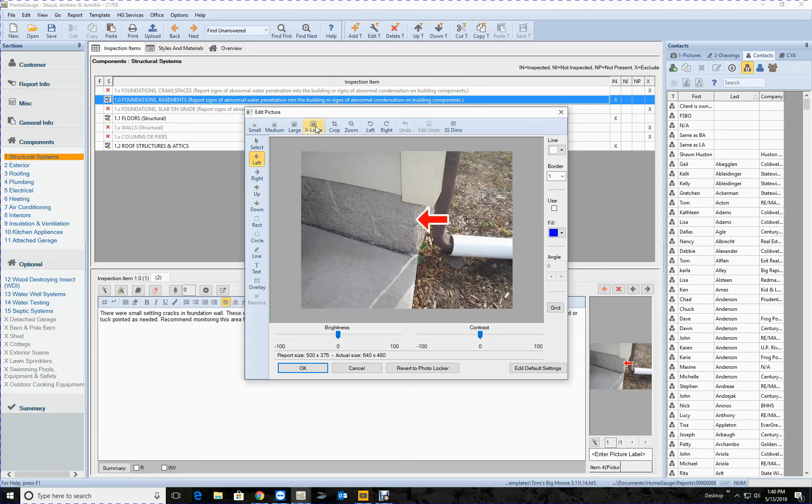Okay. Good comment. Safe comment. Okay. Okay. Pretty clean place here, eh? What if they all could be this clean?

Okay, let's answer this one. Always want to answer this one. So, of course, there's no snow, so we used to say grounds were snow covered, but you could say grounds were overall with a positive slope away from the house. That's a good safe comment. So just say something here. If you don't have anything else to say, driveway or patio or walkways, retaining walls, then just put grounds were overall, as we can. Okay.

Okay, let me see what you got here. Let me go over here and pop up these photos here. Let's see what we got. I take it you didn't get on the roof. Yeah, it's pretty steep. You can see all the sides. Look good.

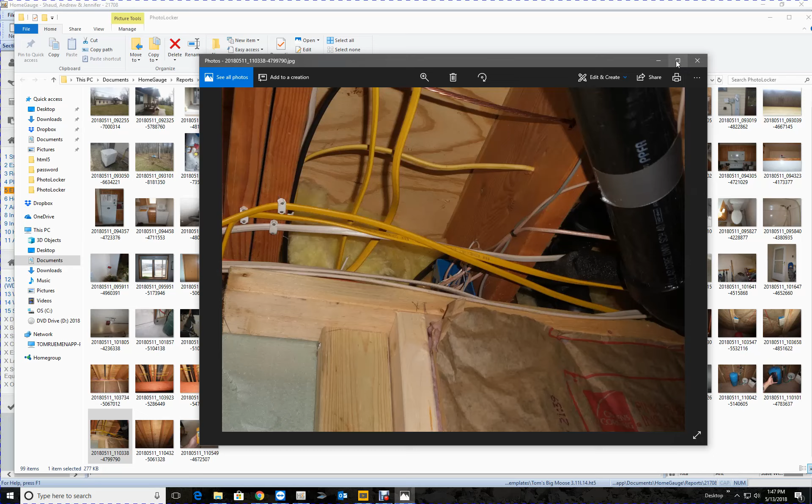Those do not look like, let me go back. They look like telephone wires. Let me see. Let me go back to the photos. Where is it at here? Is this it? Right there, let's see. See these wires right here? Those are telephone wires. That's not the Romex. So we don't care too much about those. That's not important to us.

Okay, so not a big deal. We don't need no R, no investigate. Okay, what's this unless otherwise stated? Not too crazy about that stuff. Okay, let's see how it looks here.

Okay, that doesn't mean it's not above the counter. It's inside a cabinet. It's for the microwave. That does not need to be GFCI protected. So nothing wrong with it. It doesn't. Yeah. So I'm just going to delete this whole comment. It doesn't need to be there.

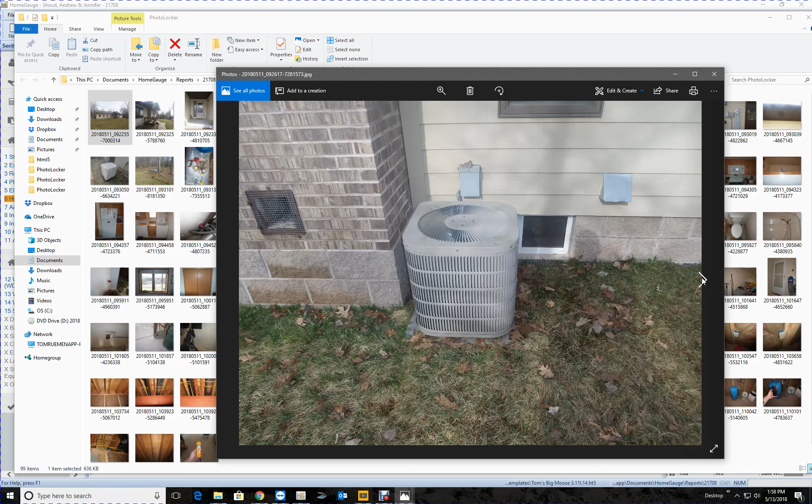Yeah, what's going on here? The door fell off, so they put a screen there. Well, we might want to address that. Maybe you already did. Okay, so the electric heater was in that room. Wonder if there was a heat vent in that room. What do you think? There's that carpet there, and no, that's the living room carpet, maybe. That's a little different carpet. Well, I guess we don't know, Joe.

So we can assume that this is in that back porch, sunroom, I guess we'll call it. There was one electric baseboard heater in the sunroom that did not work when tested. Well, something is needed. So let's see. There was one electric baseboard heater in the sunroom that did not work when tested. So we could say further evaluate.

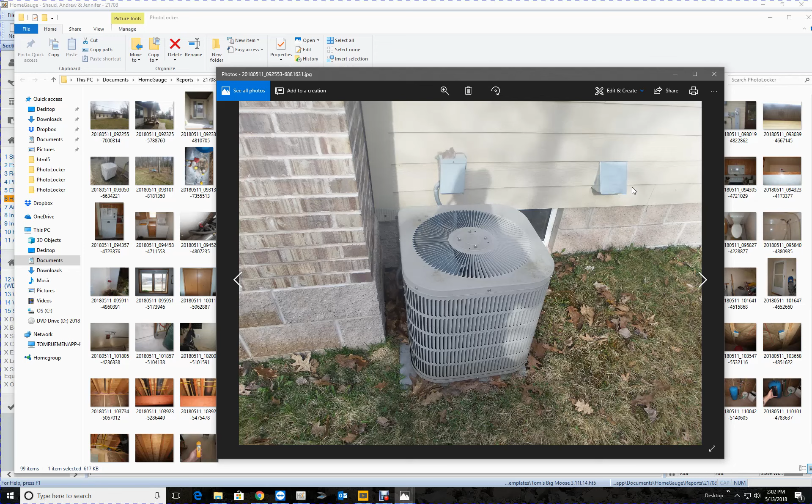I'm not too concerned about this. I mean, you're not even saying what that is. There's nothing wrong with it. So let's see. It's over here near the furnace where there's the AC unit. So I imagine it's probably, if it's not the dryer vent, is it the dryer vent, or you got another vent for the dryer? Let's see.

There's the dryer vent, so it's not the dryer vent. And there's the bathroom exhaust vents, so it's not that. So I would think that it's probably a fresh air vent for the furnace, for the return air ducts. Sometimes there's a fresh air vent that goes piped into the return air ducts on the furnace, so it brings in fresh air from the outside, because it just helps the circulation of fresh air into the home. So that's a fresh air vent for the furnace.

But you're not really particular in stating that it is or isn't or what it is. It's probably what it is, but because we don't know, we can just take it out of there. The metal vent pipe. It's not a vent pipe either, it's just a vent. So let's just take it out of there. I would say the fresh air vent for return air for the furnace was in satisfactory condition, but I'm not for sure that's what that is. So let me get rid of that. When in doubt, wipe it out.

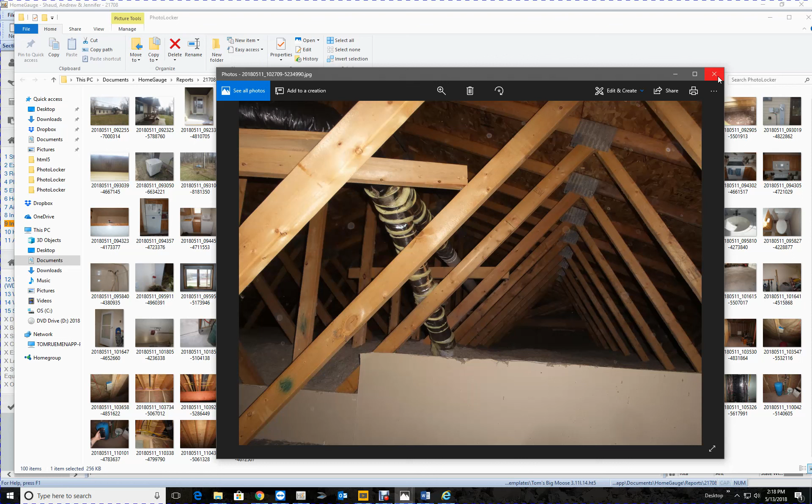Okay, let me see what you got going here, bud. I know you were talking about the garage firewall protection, but let me just look at this garage. The garage ceiling is drywall. So as long as the garage ceiling is drywall, then that's fine. You don't need the wall to go up into the attic. Now, if there was no drywall on this ceiling, then of course this wall would need to extend all the way up to the ridge.

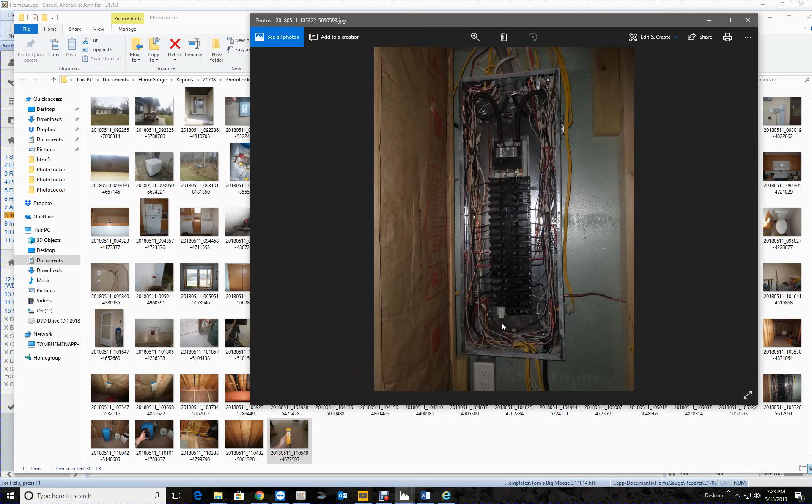Counting on you, man. Okay, let's see if there's any other mice activity, any other d-Con boxes. And keep your eye open, man. They stick those d-Con boxes everywhere. Also looks pretty clean.

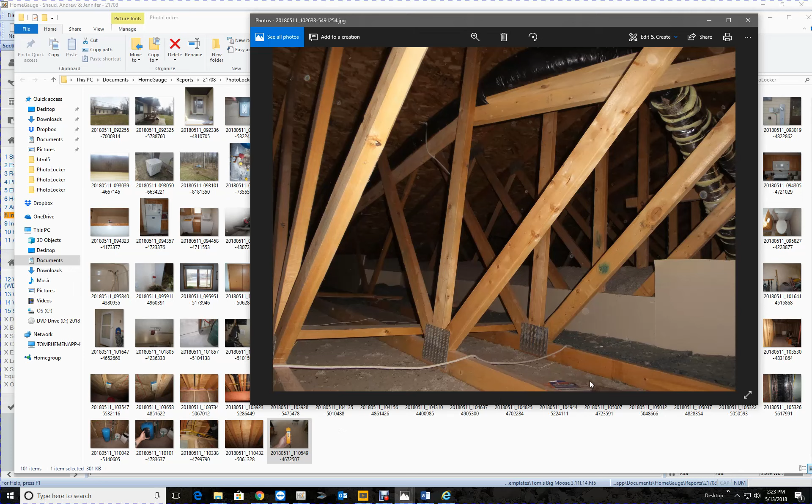What else is down there? I can't tell what that package is. Not sure what that package is right there. Not sure, but I can see the d-Con boxes. 1, 2 d-Con boxes, buddy. Yeah, I see those, man. Yep. Okay, they just opened it up so they can see water flow. Not a big deal.

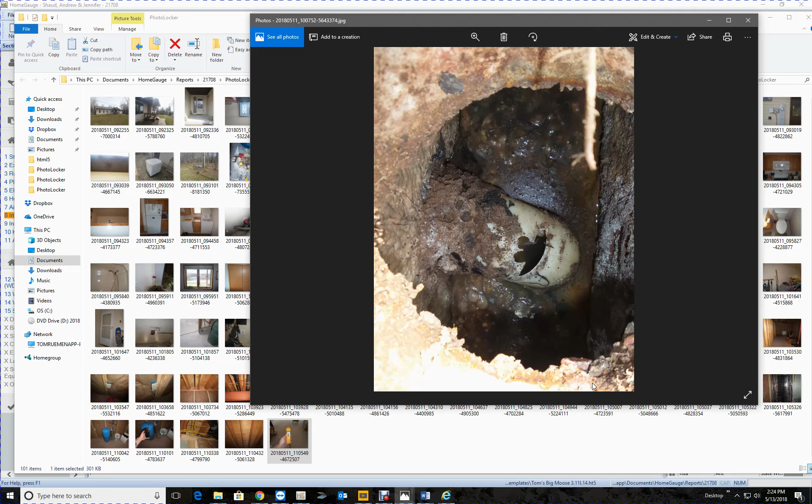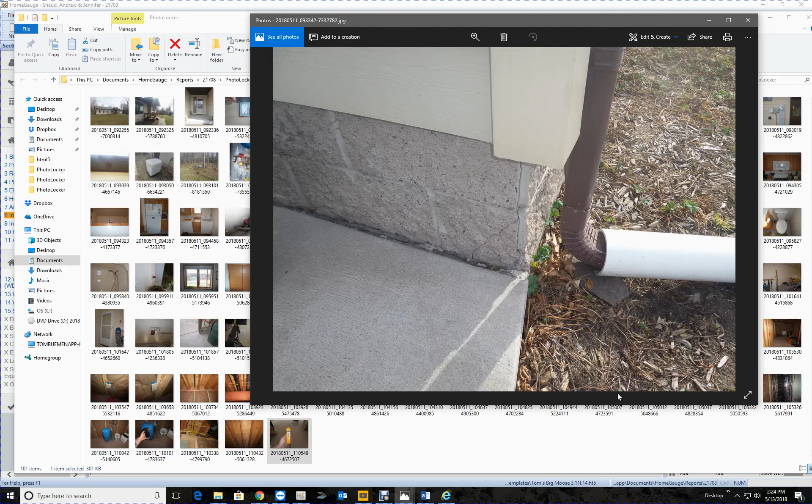No more decon, man. I'm about done here. All right, outside. Okay, good. All right, back to our new report. Okay, man, and you can save this for next time. Mice activity. There you go. And the next time it'll be there for you.

All right. So we gotta get rid of that. And then we can get rid of this. Not needed. Good. Good. Need to zoom up on this one. Good. All right. Make sure it's small. Good. Great. All right. Good.

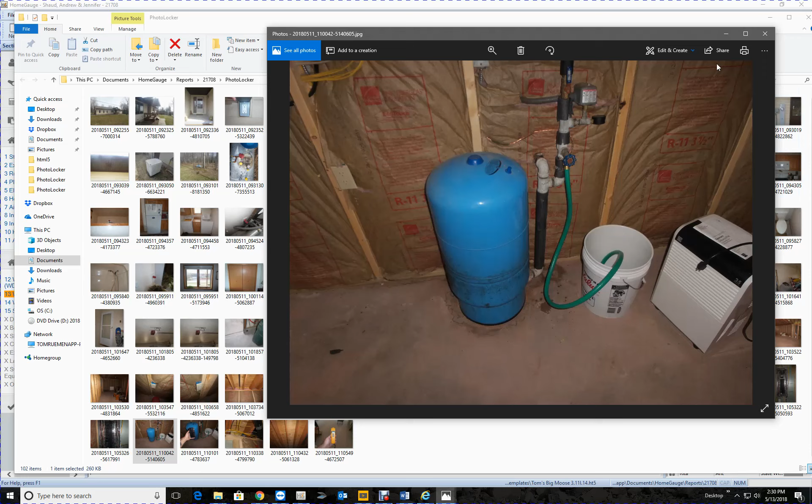So what we're going to say on the comment is, note, the water stored in the pressure tank should be 5 gallons instead of 1.5, which indicates the air pressure in the pressure tank may need to be adjusted for optimal performance.

For optimal performance, let me just put it this way, adjusted for optimal performance, period. Okay, how's that sound? Note, the water stored in the pressure tank should be 5 gallons instead of 1.5, which indicates the air pressure in the pressure tank may need to be adjusted for optimal performance.